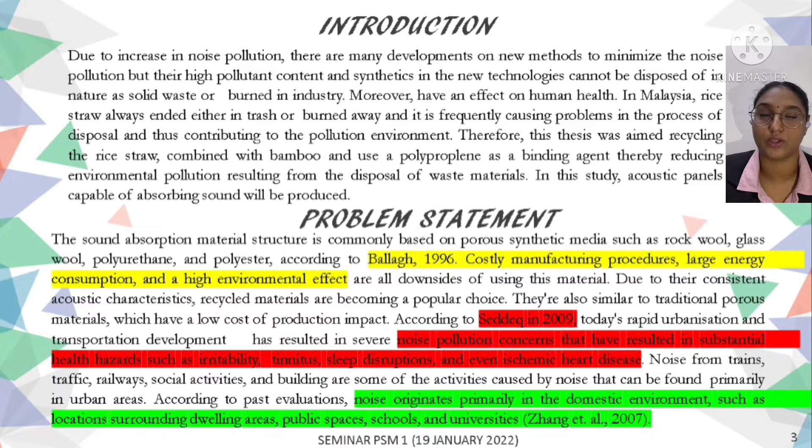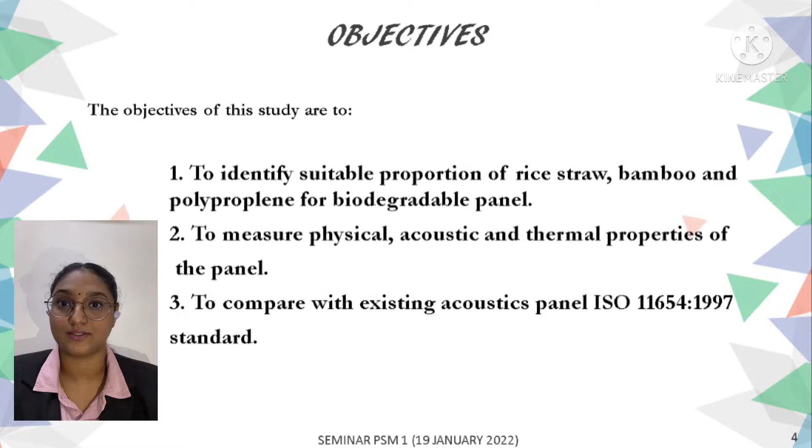However, the water absorption is higher because of the tiny pores that can be seen on the surface of the ceiling board samples. And only 1 of 6 specimens achieved the highest maximum absorption coefficient, which is 0.893. The next research was about an acoustic panel made of sugarcane bagasse, wood dust, and cornstarch glue as binder.

Based on testing results, it was found that when the mass decreases, the density also decreases. It could only achieve 0.04 thermal conductivity. Lower densities had the lowest thermal conductivity because the amount of sugarcane bagasse and wood dust with air spaces decreased, as did the size of the sample's air gaps.

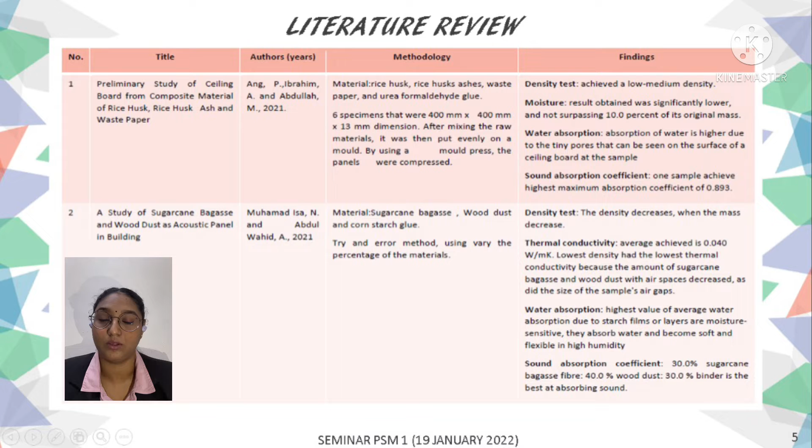Moreover, it has the highest value of average water absorption because the starch films or layers are moisture sensitive, so it could absorb water. However, only one sample achieved the best sound absorption, and the proportion was 30% sugarcane bagasse fiber, 40% wood dust, and 30% cornstarch binder.

Next, there is a study about the thermal conductivity of a particle board using rice straw with polypropylene, using a polypropylene plastic homopolymer. The plastic waste was combined with the coupling agent and heated to 175 degrees, where it can transform into a matrix. As a result, the composite has a conductivity of 0.191 at a composition of 60% rice straw.

And the last one is about bamboo as a sound absorber. This is to study whether the diameter, bamboo arrangement and length affect the sound absorption or not. As a finding of this study, bamboo with axial arrangement can absorb more sound.

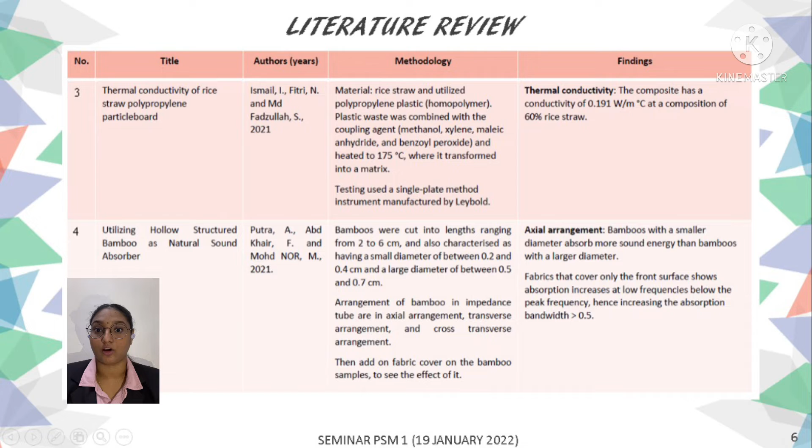Second one, acoustic test using the impedance tube method for sound absorption coefficient testing. And the third one is thermal conductivity testing using Solteq model HE110 equipment. And the last one is comparison, to compare with the gypsum standard ASTM C1396, standard specification for gypsum board.

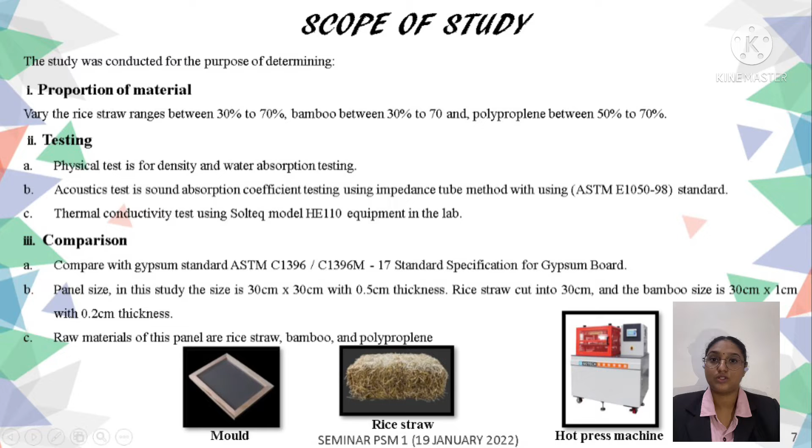The panel size in this study is 30 cm by 30 cm with 0.5 thickness, and the rice straw will be cut into 30 cm, and the bamboo size is 30 cm by 1 cm with 0.2 thickness. The raw materials of the panels are rice straw, bamboo, and polypropylene.

Next, literature review. Past study sources related to this topic are important because the process of selecting appropriate materials becomes easy when finding the results of past studies, either pass or fail. However, improvements will be thought of and made to the studies that have failed. Therefore, based on the past studies, the current suitable material to make soundproof panels is from agro waste.

Data collection included three stages, which are raw materials used, mixing of the materials, and also the molding of the panel. First step, the rice straw must be dried for several days. And then the dimension of the composites must be set at 200 gram and also 300 gram for a 30 cm times 30 cm dimension respectively. And then it was measured into 0.5 cm thickness.

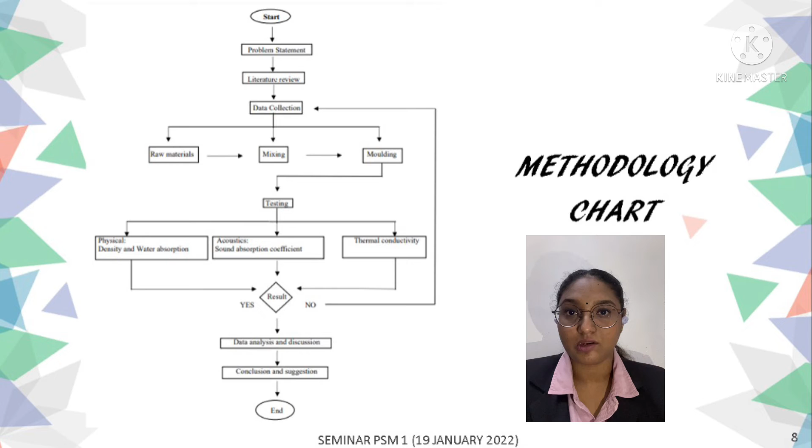The second one is the water absorption test, to determine the water absorption percentage for the panel board. The samples undergo the water absorption test following the ASTM D750 standard for 24 hours. The test is done by total immersion of all samples in distilled water at room temperature.

The sound absorption tests were performed in accordance with BS EN ISO 10534. The sound absorption coefficient was measured using the impedance tube method according to ASTM E1050-98 as shown in the figure. The sound waves travel through the tube, strike the sample and are reflected, resulting in a standing wave interference pattern. 6 different samples were used to test the sound absorption coefficient.

And the last test is the thermal conductivity test, to see whether the panel can be used as a heat insulator. The test will be conducted using the thermal conductivity of building material tester, Solteq HE model 110.

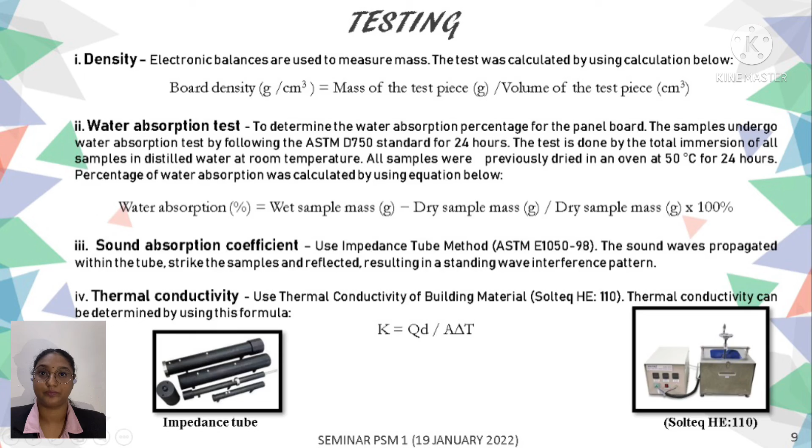From this project, the expected result from the testing is to obtain the optimal values for acoustic and thermal properties of the panel so that it can be compared with previous studies, whether the materials in this study are able to produce better acoustic panels than previous studies. Moreover, to achieve a good sound absorption panel which has a high sound coefficient and also good thermal properties by using the materials mentioned in this video.

As a conclusion of this presentation, it is about an acoustic panel made of rice straw, bamboo and polypropylene as an initiative to use environmentally friendly material as a sound absorber which can control noise, and the material used won't harm human health. Then tests such as density, water absorption, sound absorption coefficient and thermal conductivity should be done to prove that the panel has potential for high sound absorption and also good thermal conductivity.

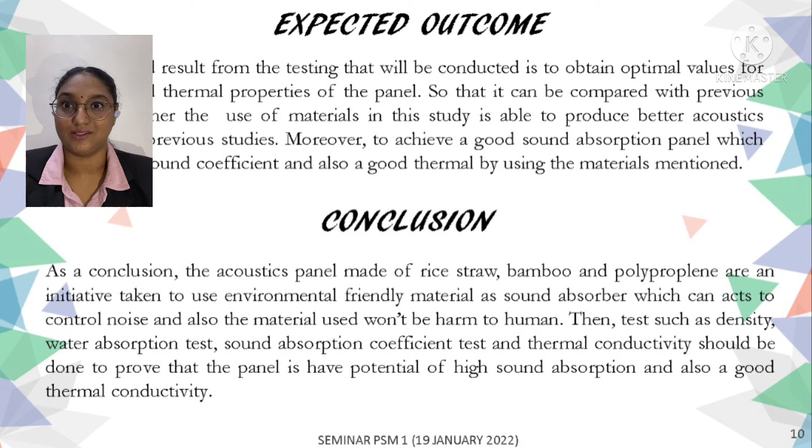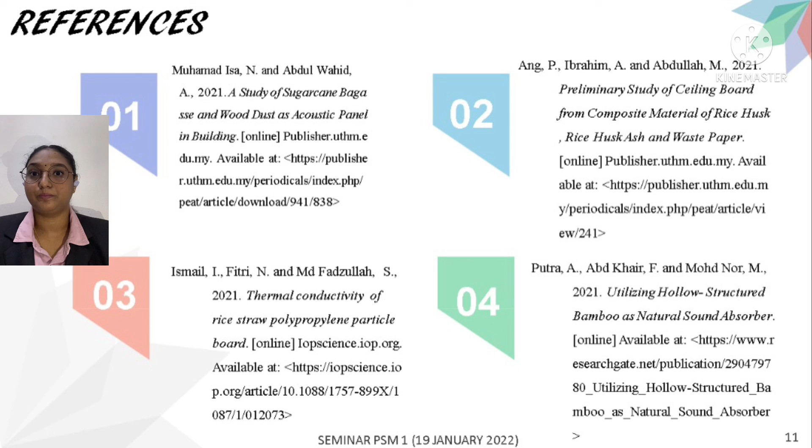My references are from various sources such as books, journals, articles, and also the internet. However, the references I mentioned here are based on the contents I put in these slides.

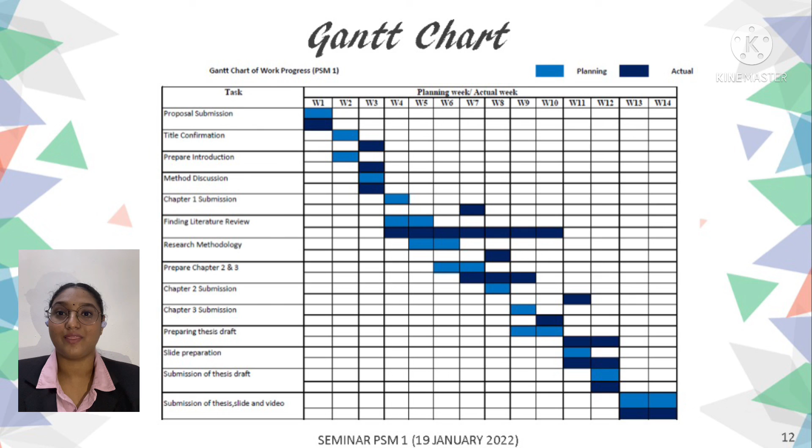The Gantt chart shows the progress of my project from week 1 until week 14. There are two colors, as you can see, one for planning and another one for actual. However, as in my Gantt chart, there are some weeks that I couldn't finish the task, especially the finding of literature review; it took a long time for me to find previous studies based on my project. But at the end, I managed to finish my thesis video and also slides on time as per my planning by week 14. That's all for the presentation of my project.